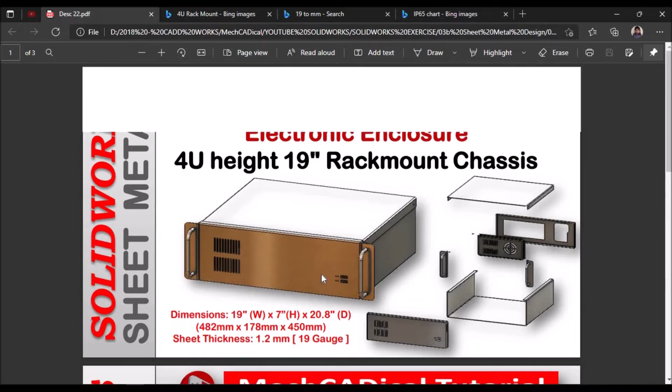See here the dimensions are 482 by 178 by 450. See here it's supposed to be 435. Okay, so I'm creating with this. I have created a sketch on the top plane. Go to sheet metal, select base flange. Here I am going to take 2 mm instead of 1.2 mm for better visibility, because thickness won't be visible while explaining.

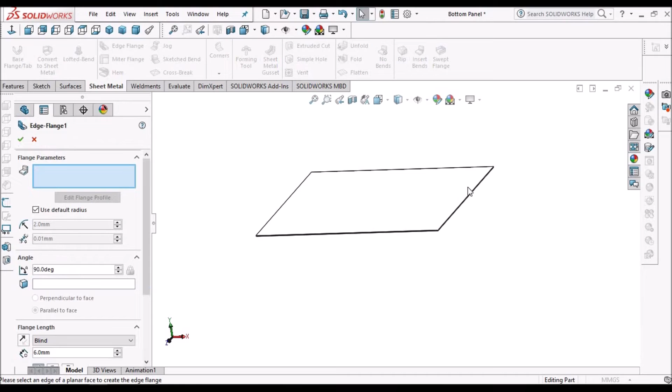K factor is 0.4. K factor changes with the material we selected. And material also I have taken SS304 for visibility, so instead of galvanized steel, I have taken SS. You can select any material. Now select this edge flange. Say OK.

See, this height is 178. The height can be varied according to our requirement. See, this one should be material inside, so we have to maintain exact dimensions of this gauge. Based on this, we are going to create the complete enclosure.

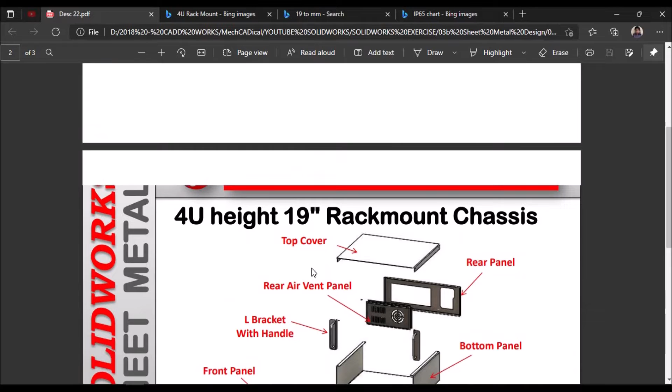So here also we have to keep it material inside. In top-down design, we have to verify everything, whether it is exactly matching the edge or not. And this is 20. So this bottom enclosure has been created. Additional features like holes we are going to add later. Next I'm going to start with top cover.

Before starting top cover, we have to create a new assembly file. I am in the assembly file. Select bottom panel. Keep it in float. Select these two front planes. Give coincident mate, top plane and top plane, and right side plane and right side plane.

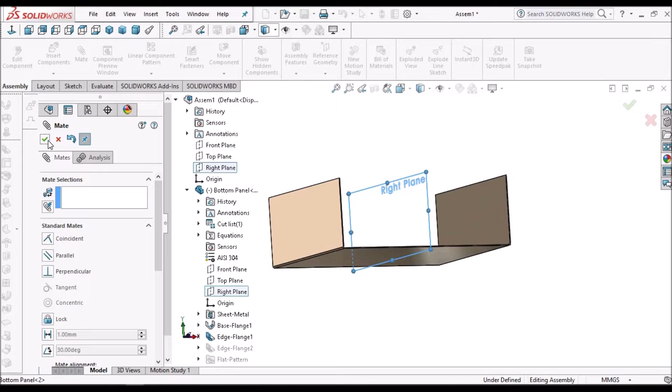The first component always should be coincident with the front plane, top plane and right plane. Now we have to go to top cover. We have to create a new part file. Select top plane. Go to sketch. Create a simple rectangle. Since it is symmetric, we have to coincide with the midpoints.

Make it horizontal, sheet metal, base flange. Here we can take 1.2. Usually the top cover thickness will always be less than the bottom panel, because bottom panels will have load on them. Here it's just for closing the enclosure, so it's not going to bear any load. To reduce the cost, the thickness will always be less than the bottom panel. Here I am going to take 2 mm for visibility. Say OK. K factor depends on the material.

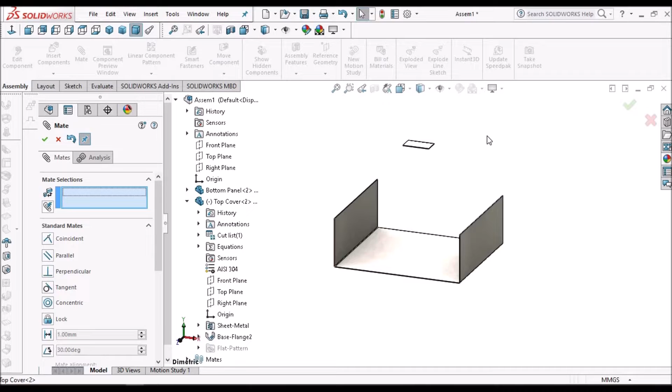Now we have to go to the assembly file, insert top cover and place it here. Coincide with front plane, because it is a symmetric component. Third mating condition should be the bottom face and this top face of the flange. Say OK.

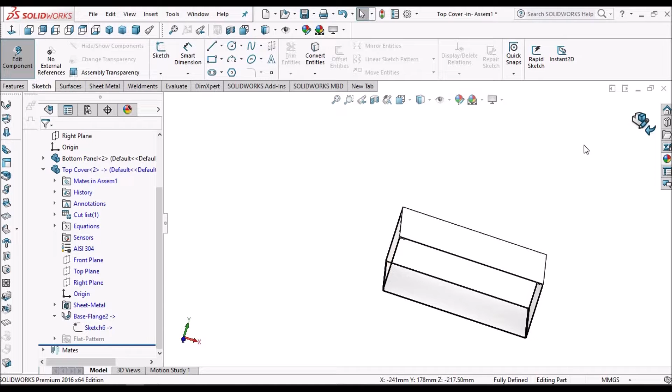Keep it in front view. So it is meeting. Now we have to read the dimensions. Keep it normal. Say OK. Come out of the edit mode. You can see here it is exactly meeting. Now we have to create this flange. Select edge flange.

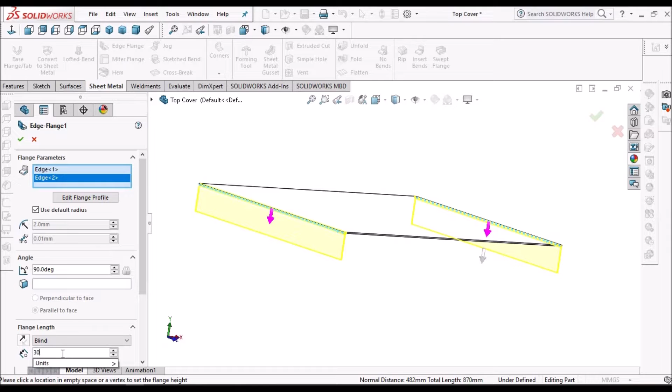This is 30 and keep it in front plane. So initially here it is taking material inside.

So let's go to assembly. So whenever we create any component, we have to make sure whether there is any interference with other components or not. So here you can see, so it's going to calculate the assembly. So there is an interference, and same thing will be in the other direction also. See here.

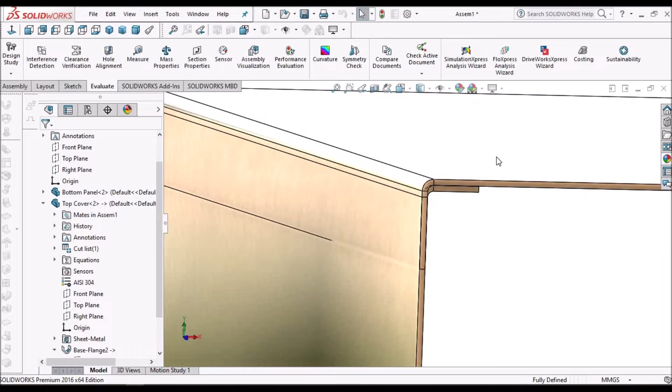So for that, what we have to do is edit the edge flange of the top cover, keep it in front plane, here go to offset with 2 mm because the interference is 2 mm. Here if you want any clearance, you can give clearance, for example 2.1. So slight clearance you can get. See here. So we cannot match exactly, so we can give the tolerance. So at this moment I am giving 2 mm.

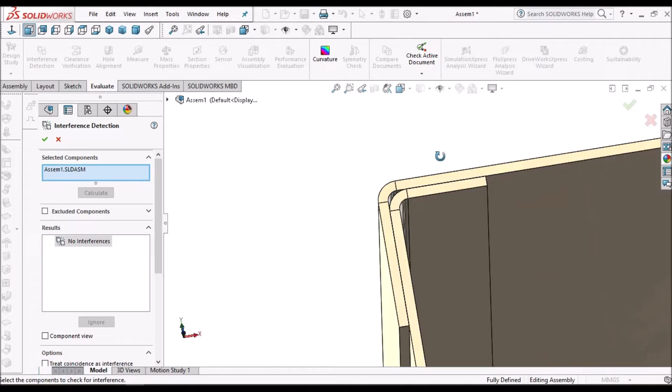Now let's go to evaluate and interference detection. Now let's calculate once again. So we can see there is no interference in the component. Save this file.

Here I am going to create holes for fasteners. So I am selecting top cover, we have to go to sheet metal module, simple hole, select this face, say OK. So this is 3 mm.

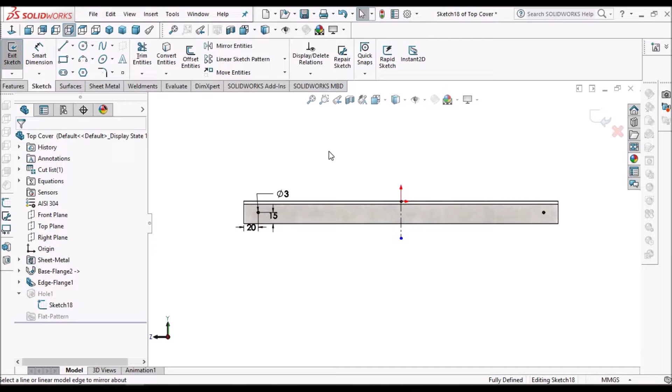Now we have to mirror this hole. See, we have to place these holes in the other direction also. So what we have to do is, we can simply edit this hole feature, and instead of thickness we can go to the through all option.

Because in the top down approach everything should be parametric. So if you are changing here, it automatically has to update. So that's why we have to select this option. Now the top cover is created.

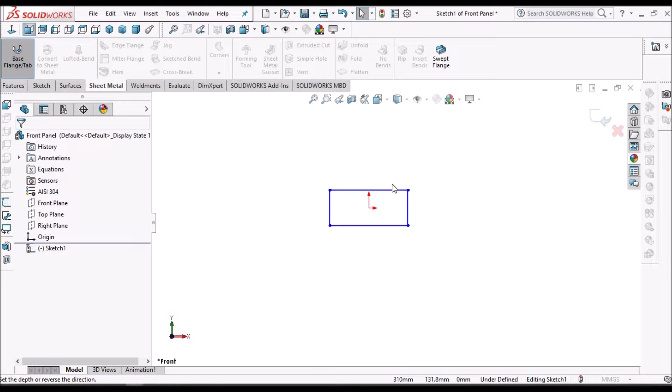Now I am going to create the front panel. Select front plane. Take one rectangle. Make it symmetric with the horizon. Go to sheet metal. Select base flange. Say OK. Here I am taking 2 mm thickness and 0.4 K factor.

Go to assembly, insert component, select front panel. Here select right plane and right plane of the component. Give mating condition. So here we have to give top plane. Okay.

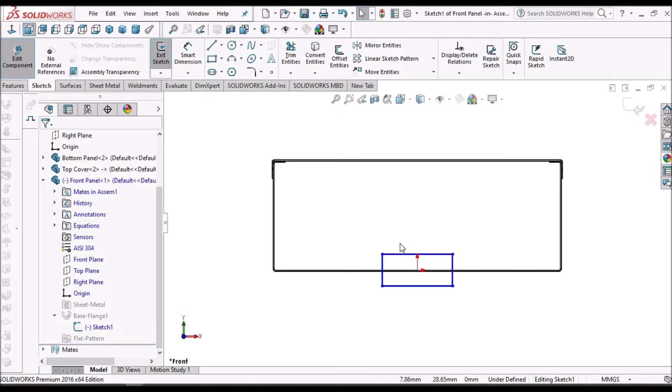Edit this sketch. Keep it in front plane. Here coincide with this edge and collinear. Select this edge and this edge. Make it collinear. And we have to drag. Come out of the sketch.

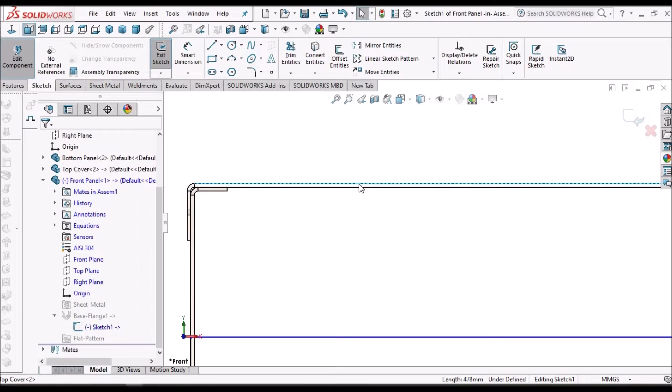So this is in edit mode now. So what we have to do is we have to go to sketch once again. Keep it in front plane. Make it collinear. Now select this face and this face. Say OK. So this is exactly meeting.

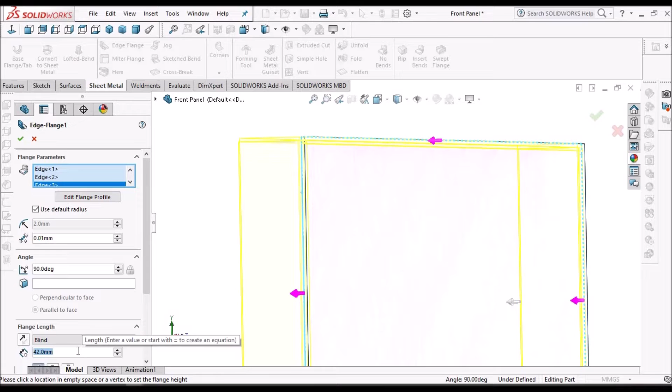Now we have to add flanges. Select edge flange. Select 3 edges, say OK, and here we have to give 42 mm. Now we have to see the assembly. So we have to check the interference. So there is interference with this. So what we have to do is

keep it in front view. Here we have to give outside. Say OK. See, here it is matching exactly. Here also it's matching exactly.

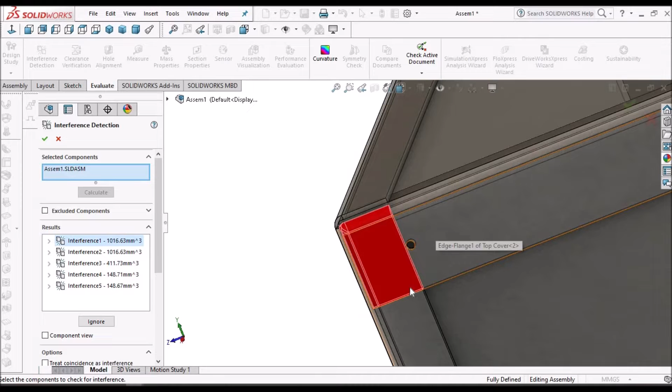Now we will check the interference. See, there is an interference with the top cover. So we have to remove this material in the top cover. So what we have to do is go to top cover. The holes are also coming very near to this cover, so we will give 40 mm.

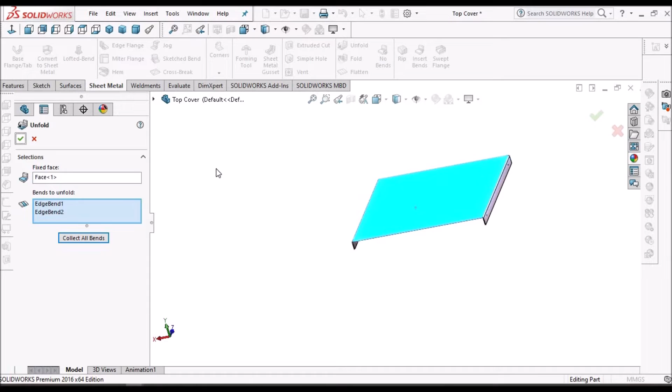Select this face, sheet metal, unfold, select bends, say OK. Select this edge and this edge, make it collinear. Select this edge and this edge, make it collinear. Select these two lines, make it collinear.

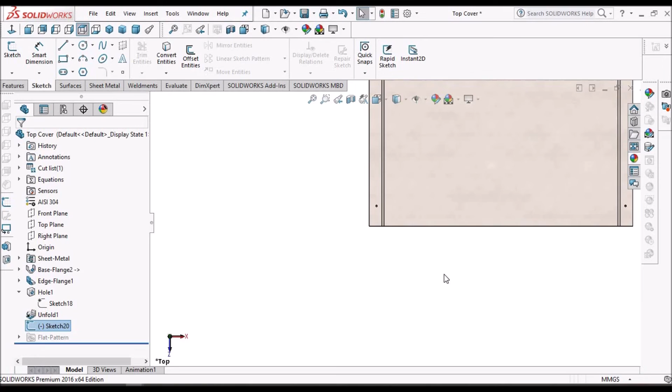So go to sheet metal, take cutout. So this cutout should not be in between this bend. So this is a thumb rule. So go to fold option, select all bends, say OK. Save this file, go to assembly.

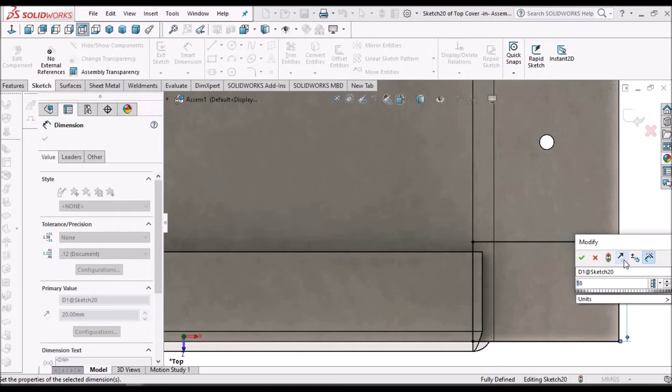So here I need to go to top cover. See here, it is exactly meeting. Say OK. Come out of the edit mode. See here, there is no interference. Later in the DFM stage, you can give the clearance or tolerance. So you can see this is negligible. So there is no major interference.

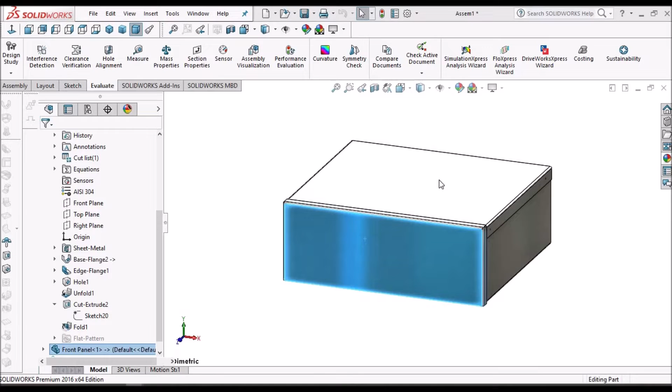Now we have to create these slots. So go to front panel. So here we have to create slots.

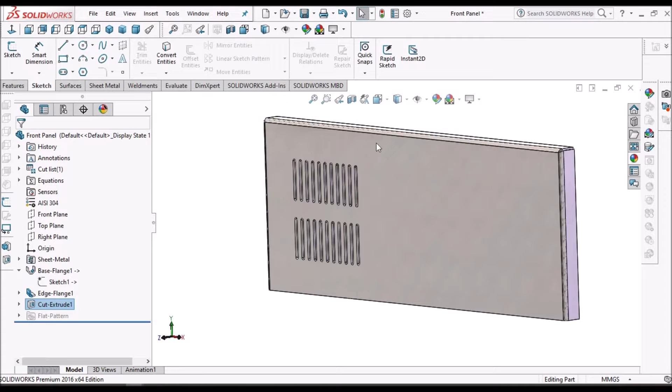Sheet metal cutout. See here, these cutouts are for USB, power button and LED lights. So we have to give dimensions according to standards. So that's why I'm not giving dimensions here. So we have to go to cutout. Say OK.

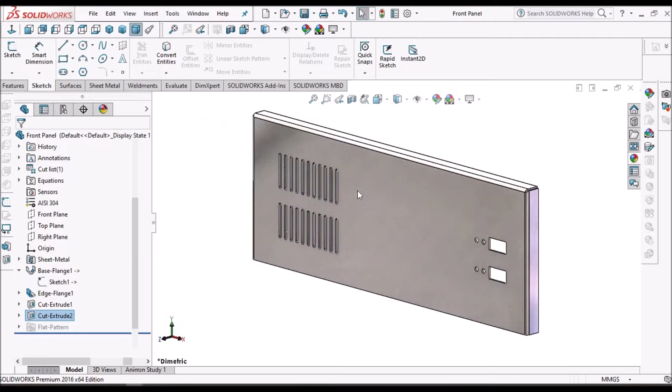So this front panel is created now. Now I am going to create this rear panel. I am in the new part file. So select front plane, go to sketch, rectangle, here I make coincidence. Go to sheet metal, base flange. So I'm taking it as a 2 mm thickness.

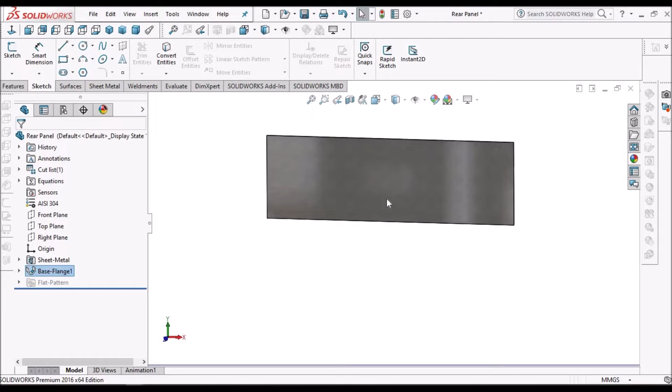Now we have to create these inside flanges. So go to sheet metal, select all 4 edges. And this is 20 mm length, and this gap we can maintain according to design for manufacturing. So I'm keeping it as a default.

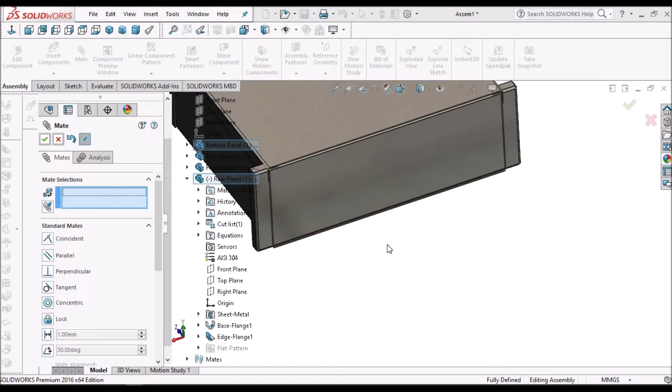Select this edge, this face, and this face. Make it coincide. Since it is symmetric, we can select this right plane and this right plane. And this bottom face, and this face. Now we have to go to base flange sketch. Here we have to give mating condition with inside edges. Make it collinear.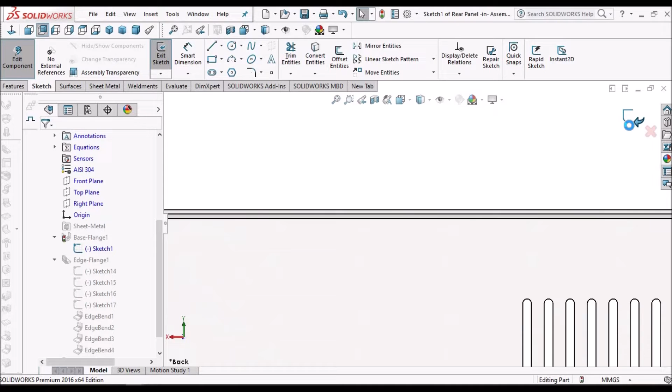See here. It is meeting exactly with this face, but there is an interference with this flange. So let's check interference. See, this is the interference.

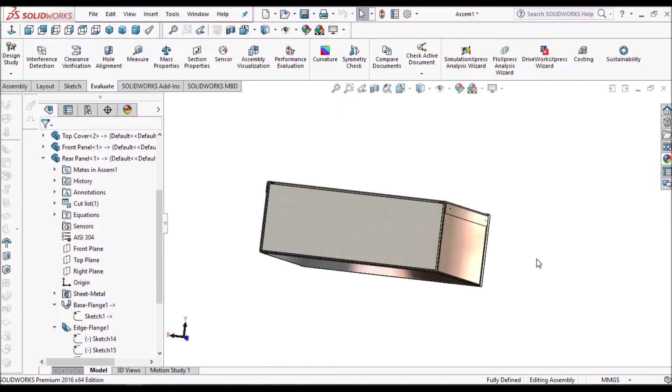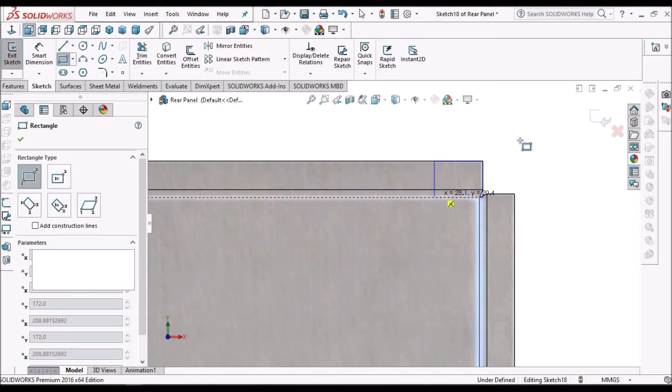So for that, what we need to do is we have to go to unfold and remove material. Select this face, keep it normal, edit sketch, and extruded cut. So we have to fold it. Go to assembly.

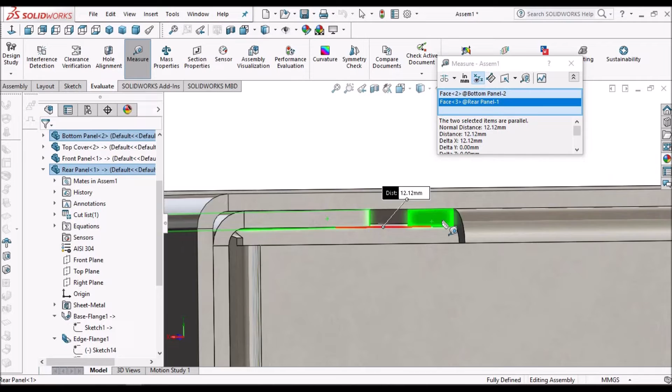So what we need to do is we have to find distance between this edge and... it's 12 mm. So we have to reduce this cutout by 12. Keep it normal. So 52 minus 12, it is 40. So we have to give 40 mm.

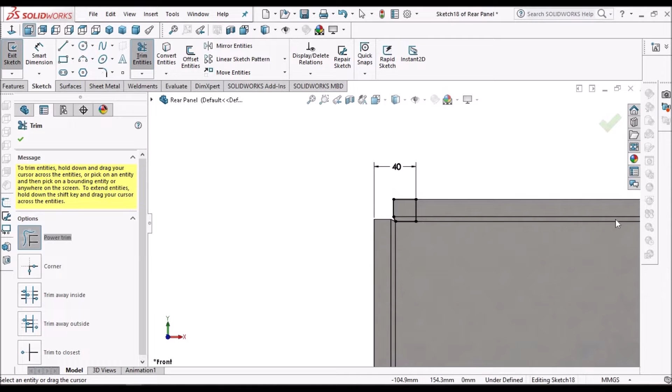And we can see this cutout here. So to avoid that, convert this entity and go to trim, remove this material. Here also select these two lines, and make it equal. And select this edge, convert entity, trim these two lines, say OK.

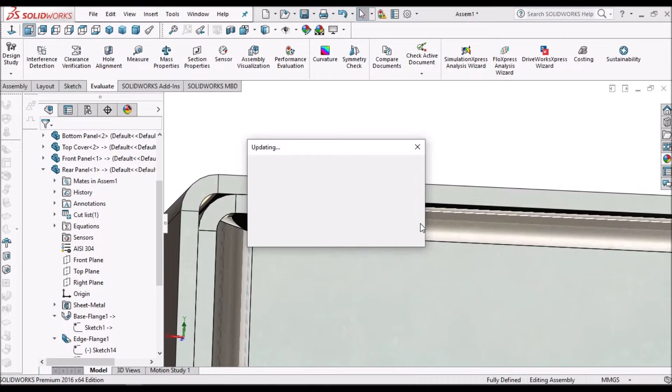So for minute things also we should be very careful in sheet metal, because sometimes these CAD models are going to feed into CNC machines. Rebuild and save, and it is going to update in the assembly. So the minor corrections we can make according to design requirements. So there is a gap at this location. So let's see how much gap. It is 2 mm.

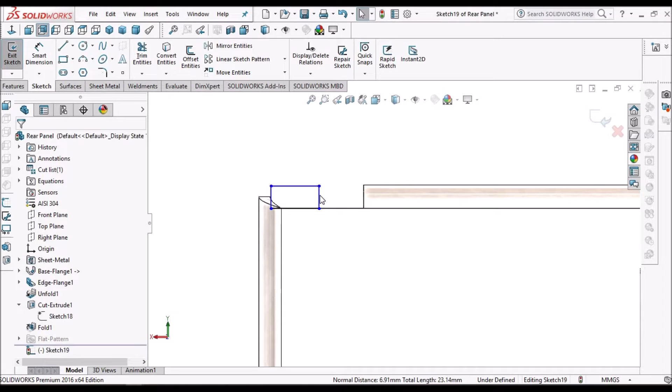So once again we have to go to rear panel, select this face, go to sketch, keep it normal. Here we have to create one rectangle. Select this face, this edge and line, make it collinear. This line and this edge, collinear. And this height should be 2 mm. Now this line should meet at this end point. So it is constrained now. So sheet metal, we have to select the tab feature. You have to see the direction, say OK.

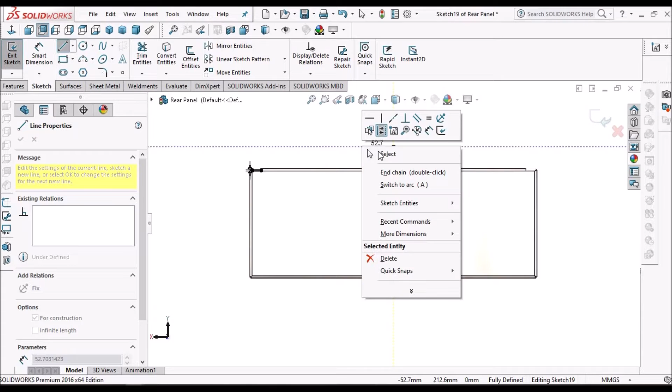Now similarly we have to create the other sketch also. Keep it normal. So create center line. Select this sketch, go to mirror entities, select the center line, say OK. So tab has been created now. Let's go to assembly. See here, there is no gap between this flange and this rear cover. So that's how we have to design with top-down approach.

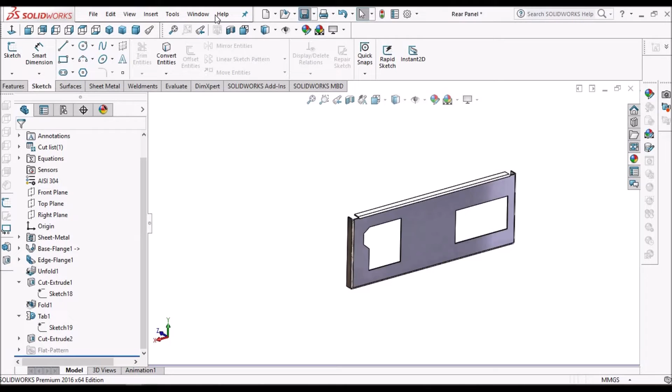Now I am going to create two cutouts. See here, these cutouts depend on the mounting fans and power supply unit. So these two are customized cutouts. Here I am not going to give dimensions to minimize the video size. Say OK. Save this file. So this rear panel is completed now.

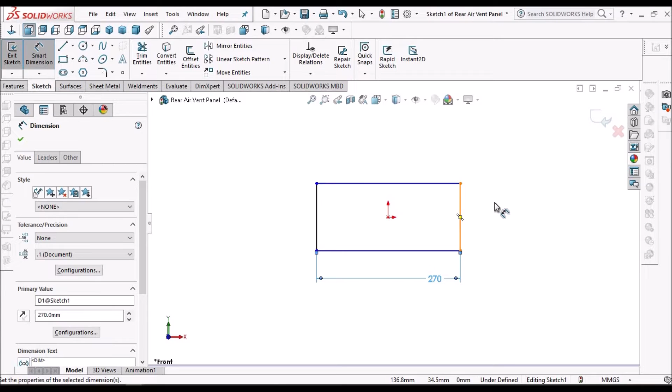Now I am going to create air vent panel. So I have taken new part file, select front plane, create one rectangle, to make it symmetric we have to constrain vertical and horizontal. So now here it will take 270, 130. Go to sheet metal, base flange.

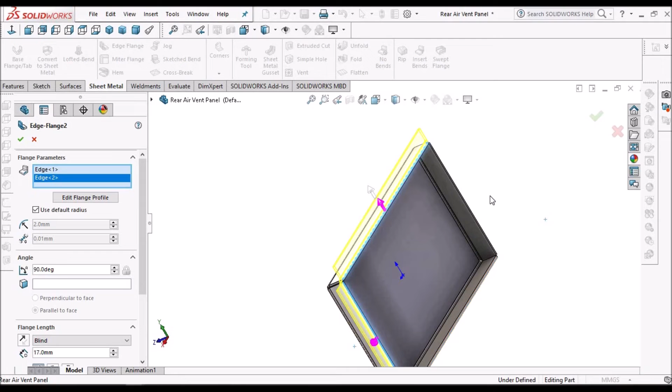Now we have to create flanges with 4 edges. Here I am keeping 20. Say OK. And I am going to create one more flange. Select this edge. And keep it 10 mm. Say OK. So let's go to assembly.

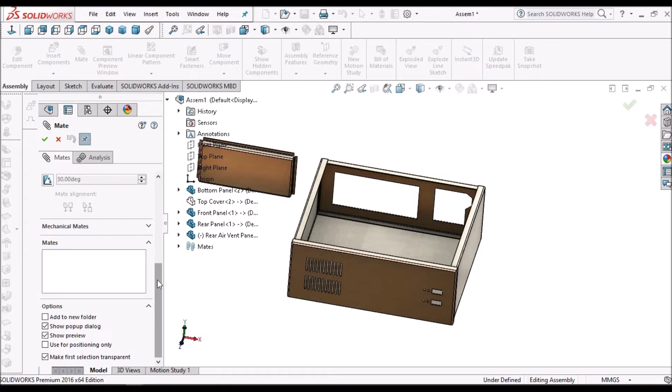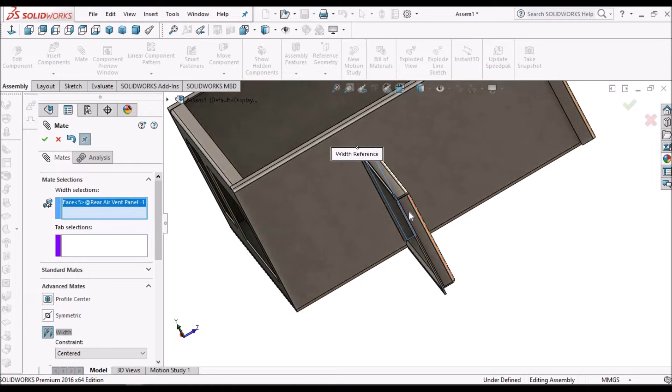Hide this top cover. Insert rear cover. Here for mating conditions, we have to go to advanced mate. Select width mate. Select two faces and here select this face. So it has to assemble exactly symmetric about these faces.

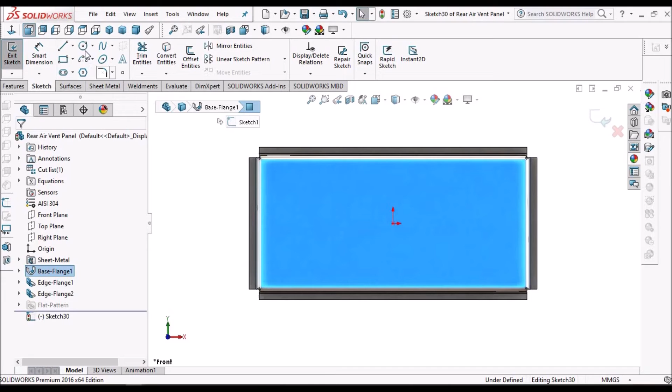Now we have to go to standard mates, keep it coincidence, and select this face, this face, say OK. Now we have to create slots and element. Go to sketch, now we have to go to vent, select this boundary, select these two ribs.

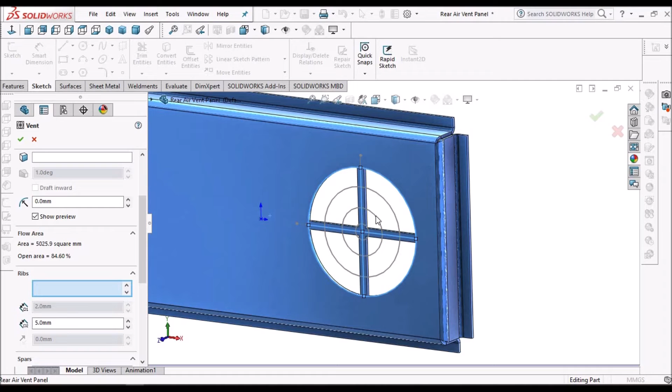So these dimensions we can customize according to standard fans available in the market. So this vent is created. Now I am going to create slots. Create one center line.

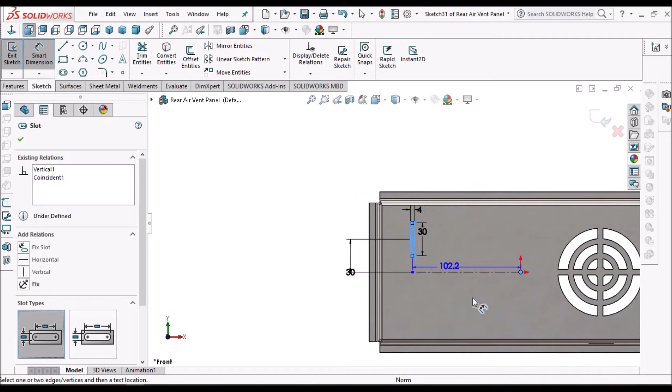So even though in this 3D model we can see the origin, in manufacturing we can't see this origin in the component. So what we have to do is, while giving the dimension, we have to make the flat pattern and give dimension from this edge. That is how we do it usually. So now let me mirror this feature.

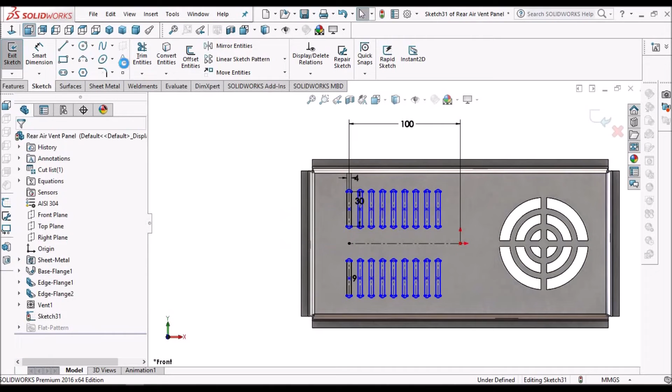Now I am going to pattern these two features. So 9 instances. So for this one it is usually better to give from the center line. So if you show from this point to this point, it is symmetric about the center line. Say OK.

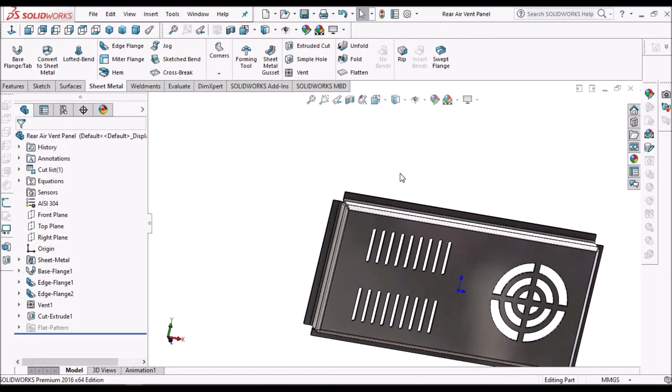Now go to sheet metal, cut extrude, link to thickness, say OK. See, this whole cutout for assembly I am not showing here because I have already created one video on creation of holes and design guidelines, so you can follow that video. My intention is to minimize the video size. So this component is created now. This is for placing the power supply.

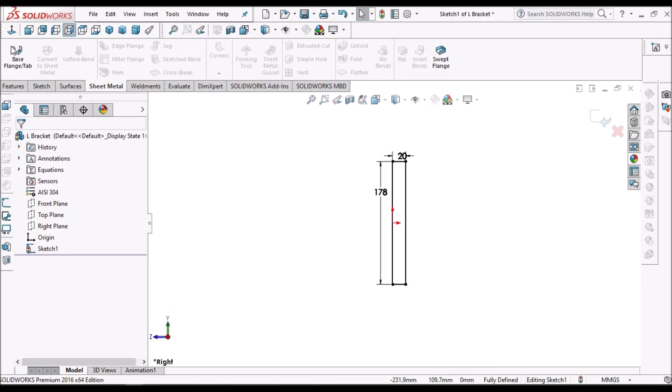Now I am going to create an L bracket for the handle. So I have taken a new part file, select right plane, create one rectangle, midpoint, make it coincide, this is 20 and this is 178. So go to sheet metal, here we can either increase the thickness or maintain the same thickness. This is for improving the strength, since it is a holding component. Now we have to create an edge flange.

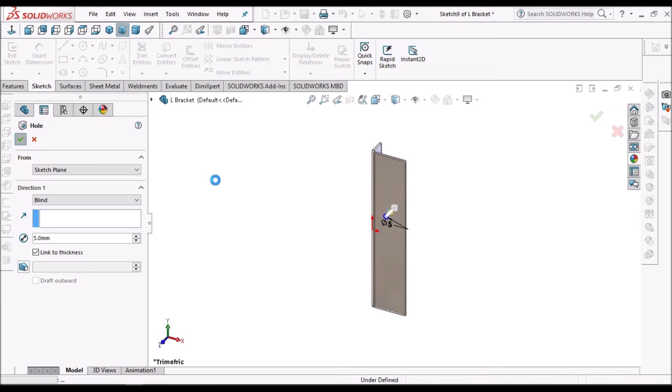Here we have to create holes. So select simple hole, you can give 5 mm, say OK. Now we have to sketch and we have to create 2 holes. So mirror this. Here it is 140. This distance depends on the standard handles available. So here this is the handle. So based on this handle we have to give the dimensions.

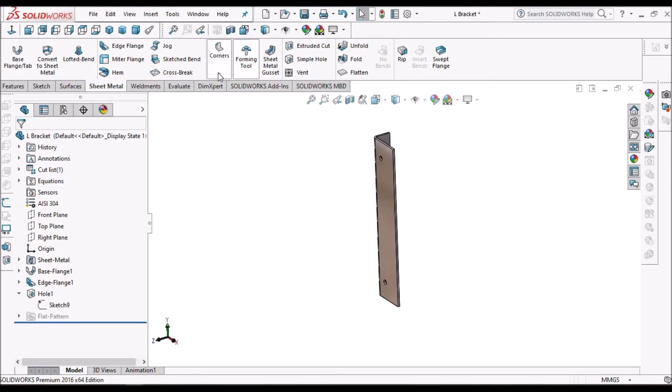Now the simple hole has been created. Now we have to provide fillets. Say okay. Save this file. We have to always rebuild this file so that it updates in the assembly. So in the assembly also we have to rebuild. Now let's go to the L bracket.

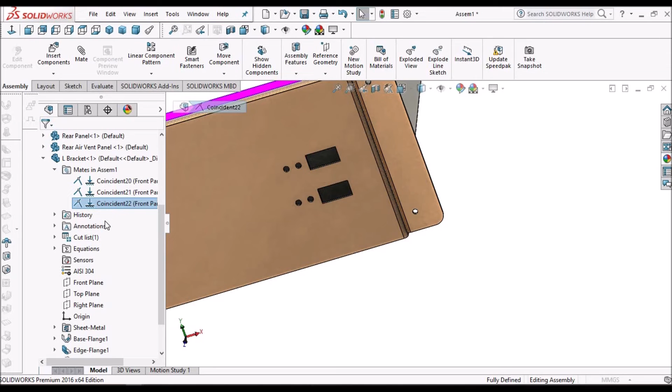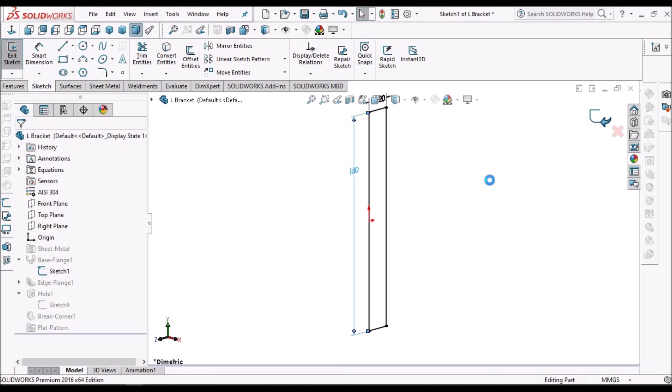See here we have to offset by 2 mm. Flip direction. Say okay. Now we have to go to evaluate, measure: 2 mm. So we have to increase by 2 mm. These kinds of miscalculations happen in the top-down approach. So we have to increase this by 2 mm, so it is 180. So we have to be very cautious with each and every dimension.

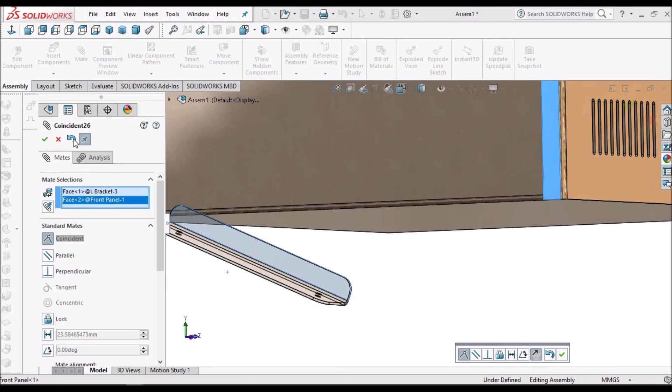See, these two components are welded by spot welding because this is a holding component. So now we have to assemble the similar component. Bracket, place it here. Now select this face, flip, and this face and this face. Once again flip this, say okay. So for mating we can select this face and this face.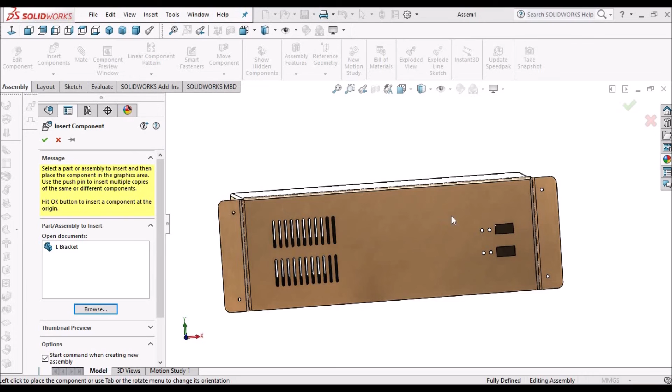Now I am going to assemble the handle. Now I am going to assemble the standard components like fasteners and handle. So insert, handle. See, initially what we have to do is select this right plane and this right plane, make it parallel. Not coincident. If you give coincident, it will give an error. So select this face and this face. Make it concentric.

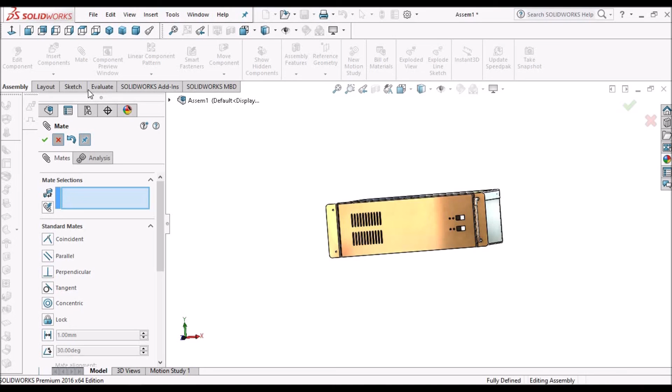Now once again we have to assemble this handle. Select right plane, make it parallel. Select this face, make it concentric. Say OK.

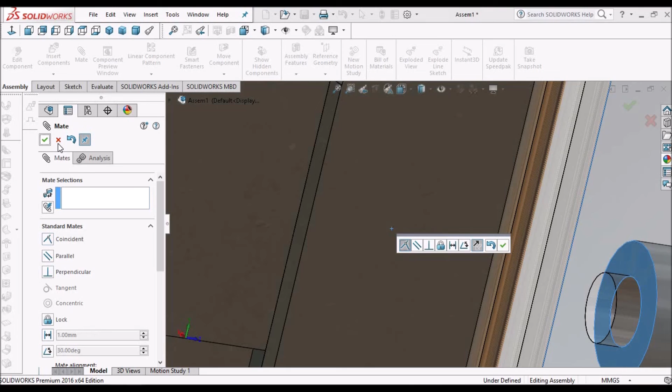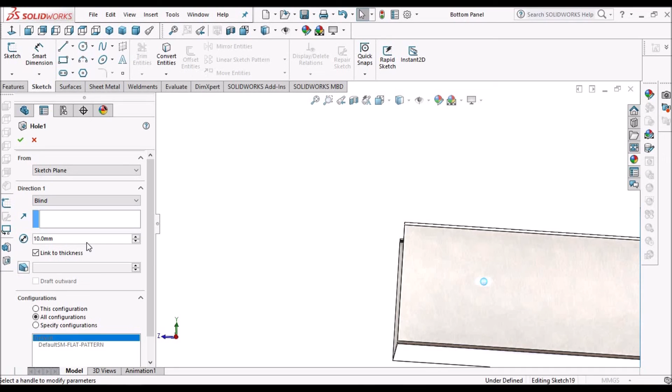Now we have to create a hole for this fastener in the bottom panel. So for that what we have to do is go to sketch, go to simple hole, select this, say OK. Give through all. Save this file and go to assembly.

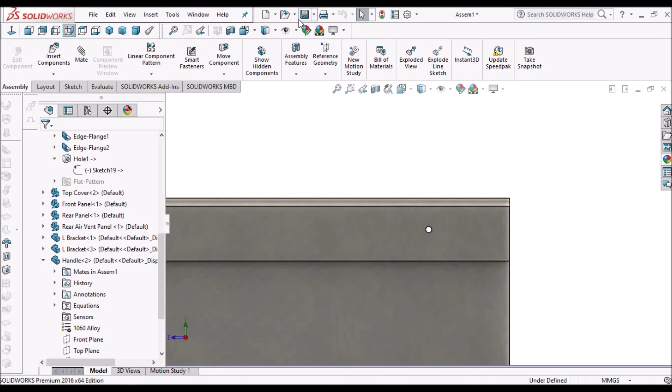Now we have to edit this hole. Go to sketch, keep it normal. Make it concentric, and here I am going to place an M3 hole, M3 fastener. So come out of the edit mode, rebuild this and save this file. We have to always rebuild and save this file frequently once each feature is created, otherwise the system will hang up. And finally save this file.

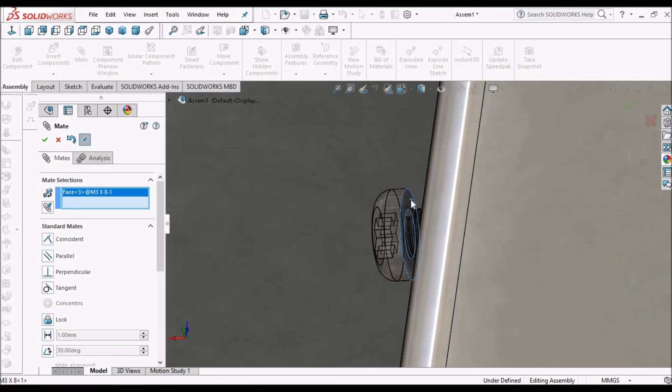Now here I am going to insert fasteners. See, M3 by 8 screw. We can select any screw size according to our design requirement. So here select this face and this face. Okay. And this one and this. So for this fastener, 2 mating conditions are sufficient.

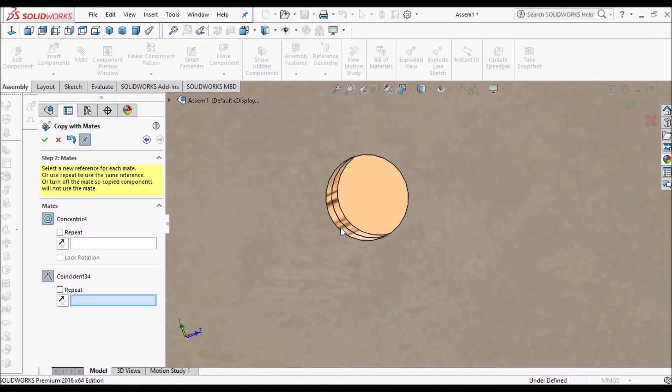Now for other locations, what we have to do is go to copy with mates. Select next. Concentric, we have to select this, and coincident we have to repeat. Say OK. Now concentric, select this face, and for coincident we have to select this face. Say OK. Other fasteners we can add according to requirement. So this is our enclosure.

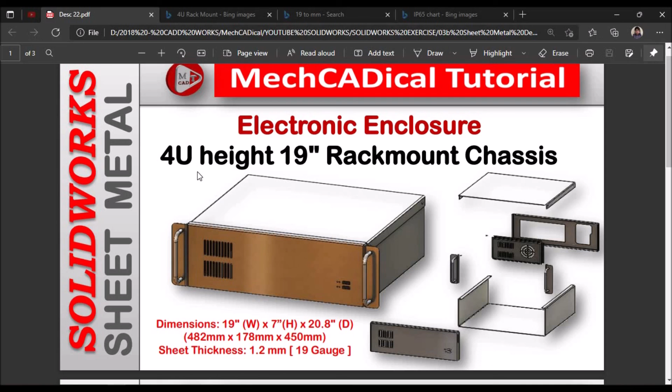So finally we have created an electronic enclosure, that is a 4U height, 19 inch rack mount chassis, and we have created the bottom panel, top cover, rear panel, front panel, L brackets, and rear air vent panel. For materials we can select 304, cold rolled steel, or SGCC zinc coated steel, that is galvanized steel. So this is a brief about electronic enclosures.